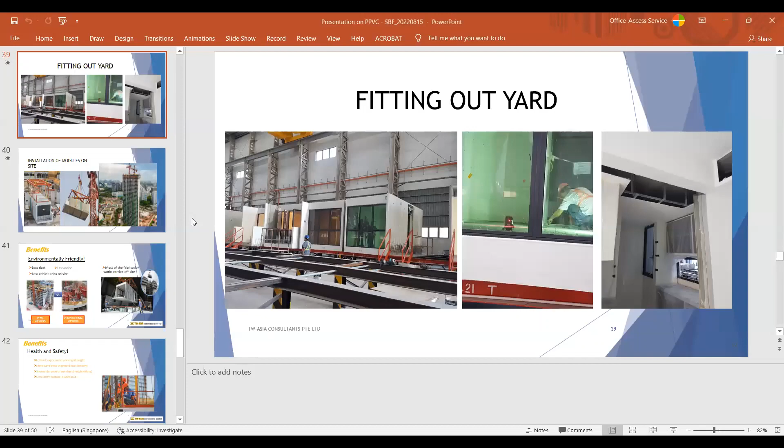Good afternoon, ladies and gentlemen. I am going to do my presentation on prefabricated, prefinished volumetric construction, which is commonly known as PPVC, the challenges and journey to achieve productivity target. So this is one of the PPVC, which you may see nowadays in many construction sites.

So as a consultant, TW Asia Consultants Private Limited, we are involved with many of the PPVC projects, some of which we can show you here, just photos. So all these are mostly residentials, though there are a few non-residential also. So one of the landmark PPVC projects is the Clement Canopy, which is 2 blocks of 40-story apartment buildings. And this is the first of its kind, meaning RC PPVC of 40-story apartment building.

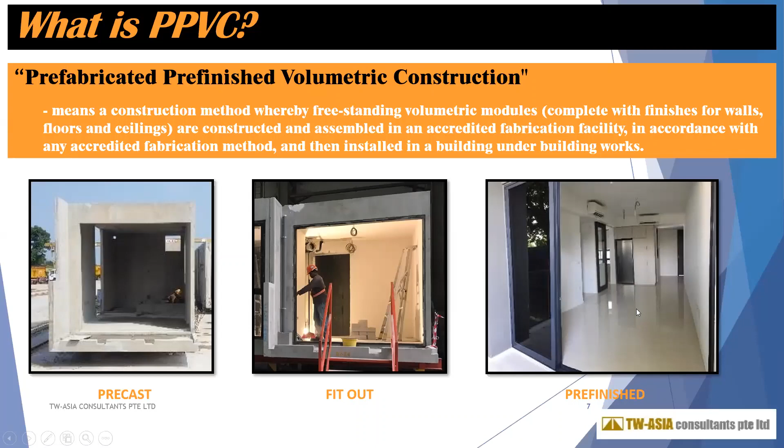So what is PPVC? This means a construction method whereby freestanding volumetric modules completed with finishes of walls, floors, and ceilings are constructed and assembled in an accredited fabrication facility in accordance with an accredited fabrication method and then installed in a building under building works. So it starts with precasting of the module, then the fit-out works, and you are getting the pre-finished unit or volumetric unit.

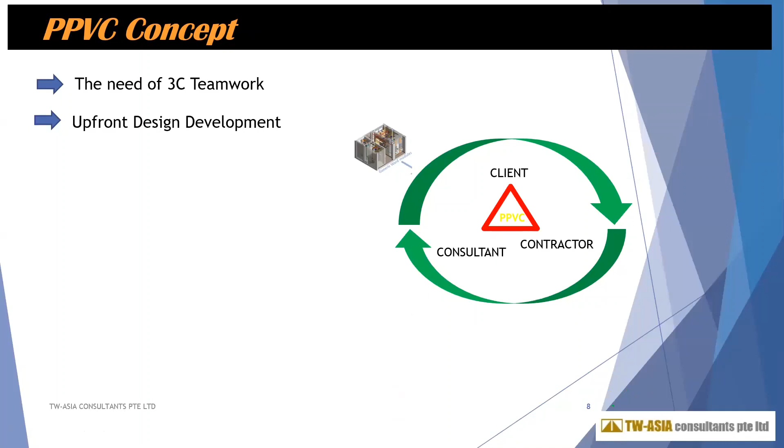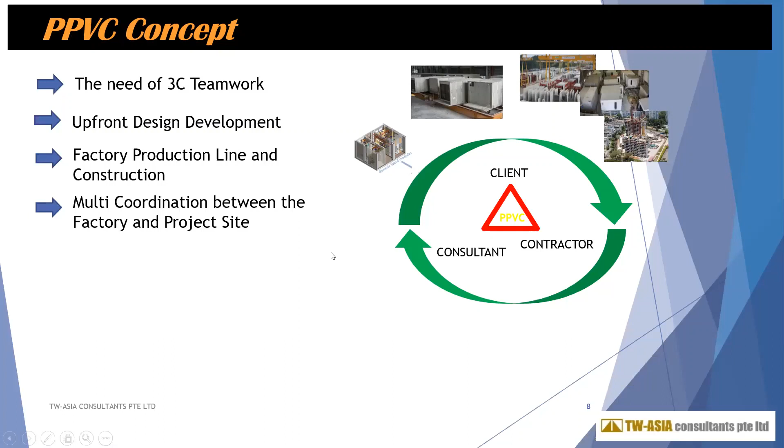So this actually requires, we can say, 3C teamwork. That means client, contractor, and consultants collaboration, and upfront design development. As you know, this is pre-finished. We are saying precast. So all the things need to be settled upfront. And it's a factory production line, so that means add-ons for factory production, and multi-coordination between the factory and the site. That means fabrication is in one place and the site will be in another place.

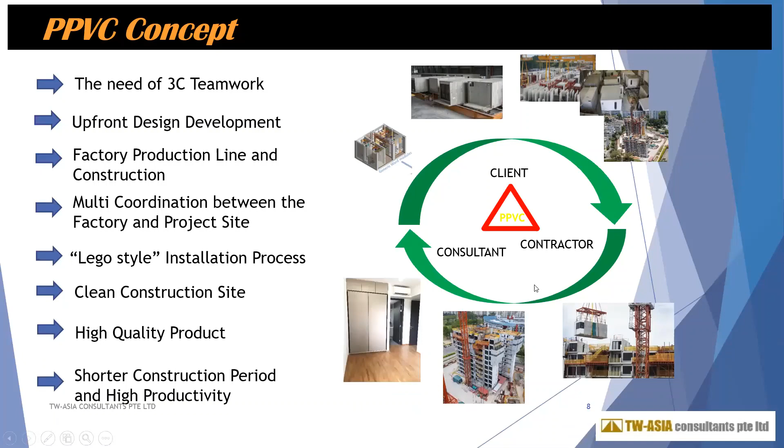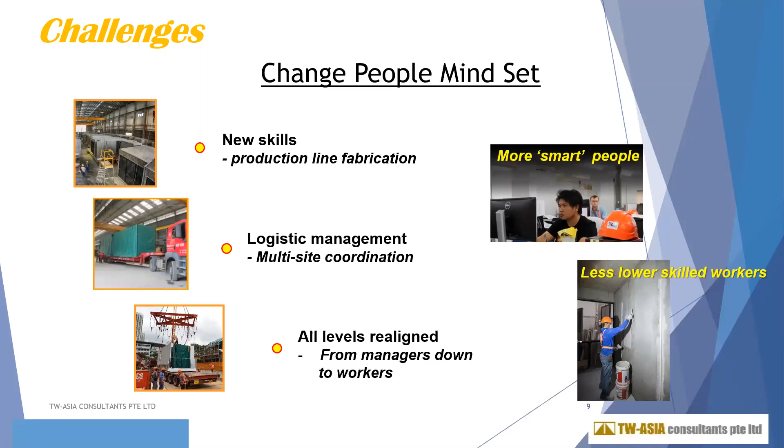And the installation is basically a Lego-type installation. That means putting on top or putting beside, and you are getting a clean construction site. So high quality products, shorter construction period and high productivity. And we need more smart people for this kind of work compared to conventional construction, and also a lesser skilled workers requirement.

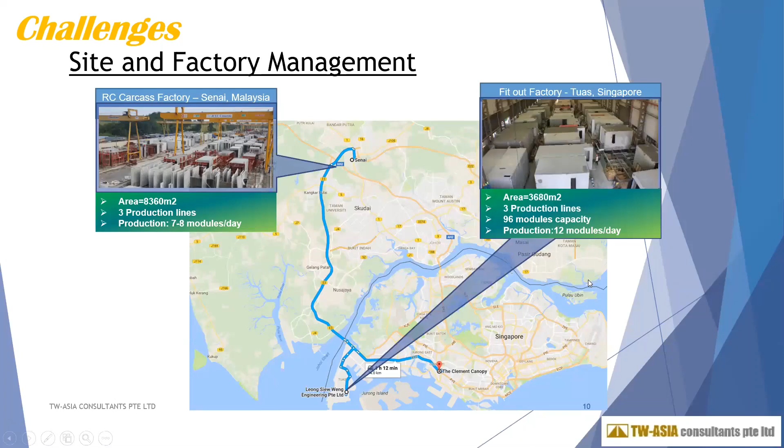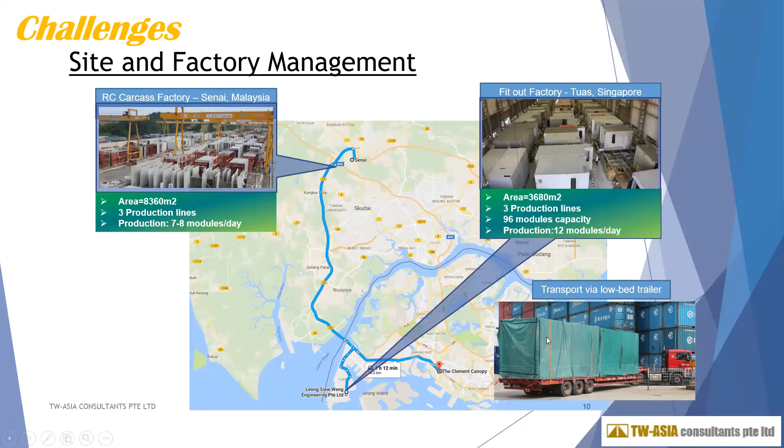Say, this is one site and factory management issue. The site may be at a far place. For this case, it is in Senai, Malaysia. And then it comes to the fitting-out factory in Tuas, Singapore. And the project itself may be in any place of Singapore, like over here is Clement Canopy. Yeah, that's there, Clementi Avenue 1.

So the challenges are, first, of course, the precasting. Then it is the fabrication yard. You need a large fabrication yard. Then, of course, a fitting-out yard, and final installation. So a typical convoy is something like this, and there is a limitation on the size because on road there is a limitation of lane width, which is 3.4 meters. So the PPVC unit cannot be more than 3.4 meters wide. Also, there is a height limit, which is 4.5. That is also a limitation that should be taken care of.

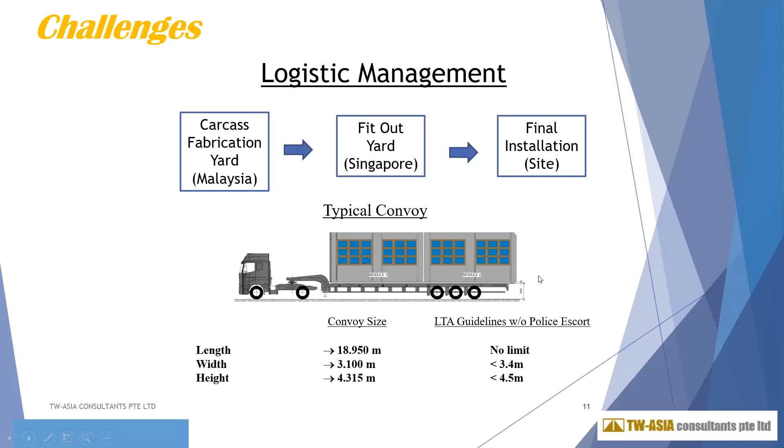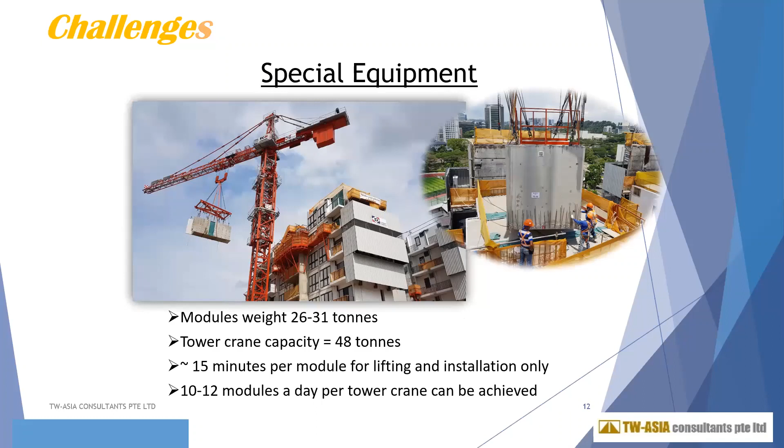So special equipment is also required because each PPVC module weighs about 26-31 tons. So you need a heavy capacity crane, tower crane, that can handle that kind of PPVC module.

So overview of PPVC: we already mentioned that it is prefabricated, prefinished volumetric construction, which is manufactured and assembled. The first one is basically component-wise construction. That means floor and wall separately and then assembled, or you can manufacture it as a whole 3D volume. So wherever we are casting this PPVC, that needs to be an accredited facility.

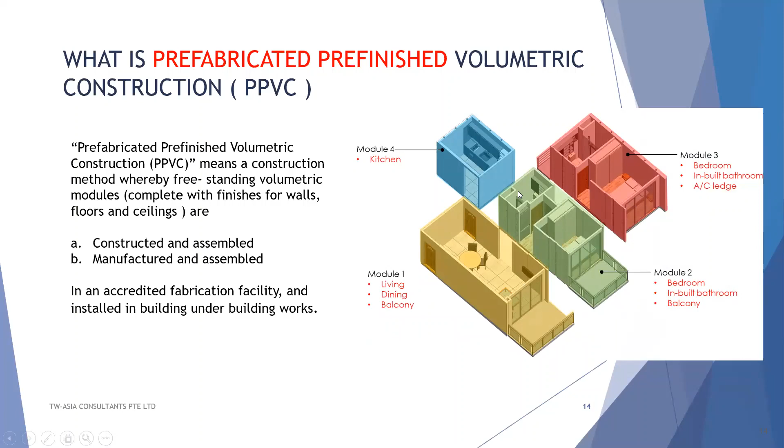So why PPVC? Driven by the need to reduce reliance on labor with shorter construction time, but with no compromise to quality. So productivity-wise, overall construction duration can be reduced with this construction method. And for each floor cycle, time of installation is shorter. The quality of building works is consistent in a controlled factory environment.

Higher quality control and assurance in the fabrication and assembly process, labor saving, improved worker safety, and it also provides environmentally friendly working conditions at site and less disturbance to the surroundings.

So we talk about concrete PPVC. Basically there can be two types of PPVC, mainly concrete PPVC and steel. For concrete PPVC, the advantages are lower cost, material readily available, good acoustic condition, durability, and low maintenance. The disadvantages are heavier modules and crane consideration; that means to handle those heavier modules, you need heavier cranes. So this is the concrete module.

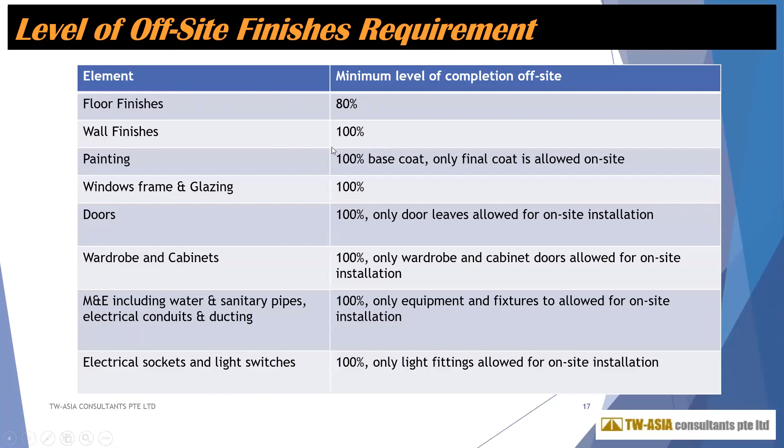Okay, for PPVC, there is a requirement from the regulatory authority that we need to complete the finishes at least to a certain percent, which is almost 100% for most of the trades. But for floor finishes, 80%, wall finishes 100%, and so on.

So here is a 3D module. All the MEP areas are inside, and it's a 6-sided module. That means the floor, roof, and 4 walls, 6-sided. So this module should be able to withstand the loads during transportation, during installation, and in the final building structure.

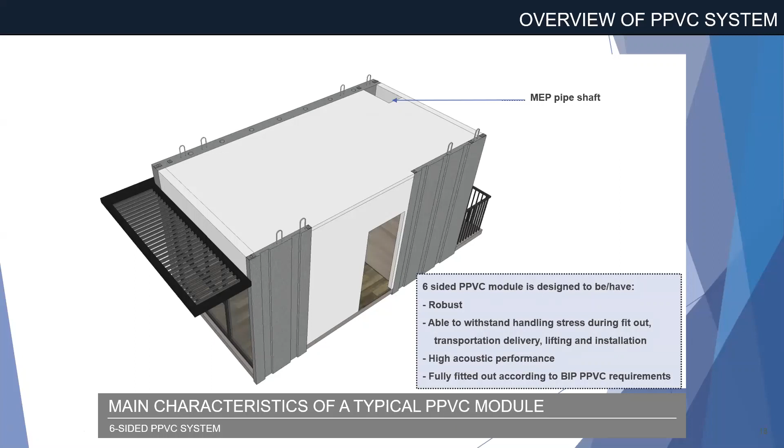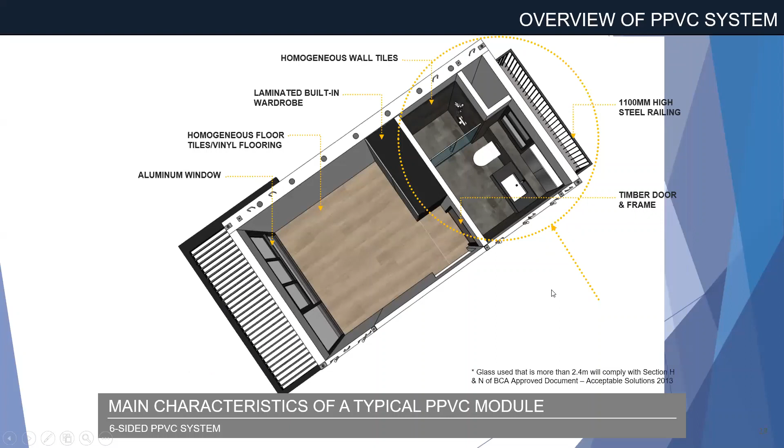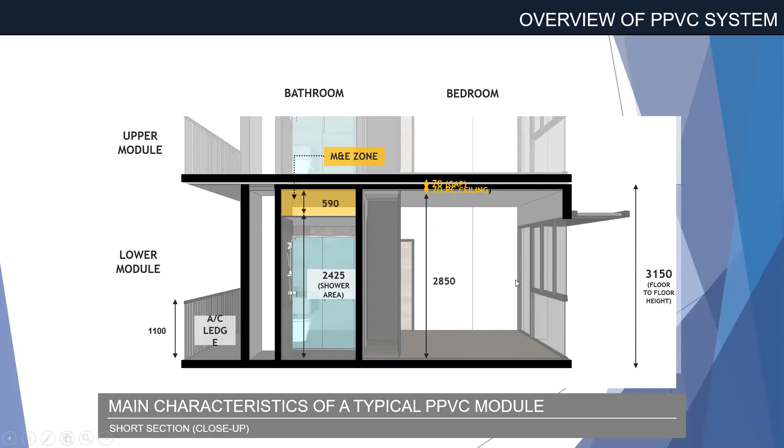So here is a section of the module. Over here, you can see the overall height is 3150 for a particular case, and the clear height you can get is 2850. The roof slab is a 70 mm RC ceiling, and there will be a gap between the floor and the slab below of about 70 mm. Once you put them side by side, it will be like this. And we have to do the joints in between all the modules to get the structural integrity.

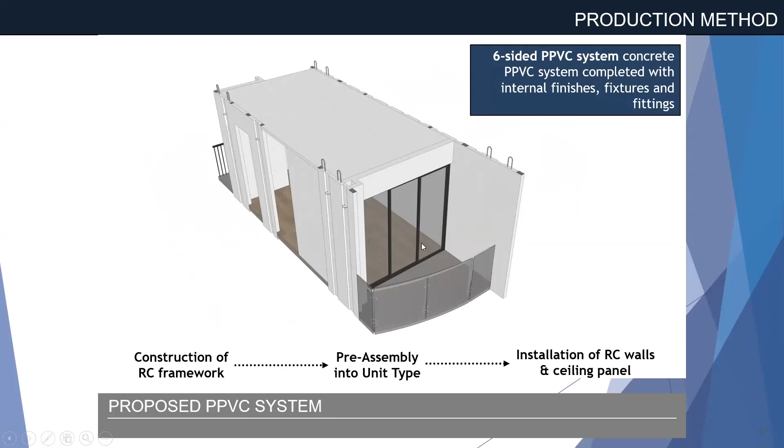So here is the single module. There is some flexibility needed to accommodate not only rectangular, but maybe slightly different shapes of the facade areas. So it's a 6-sided module.

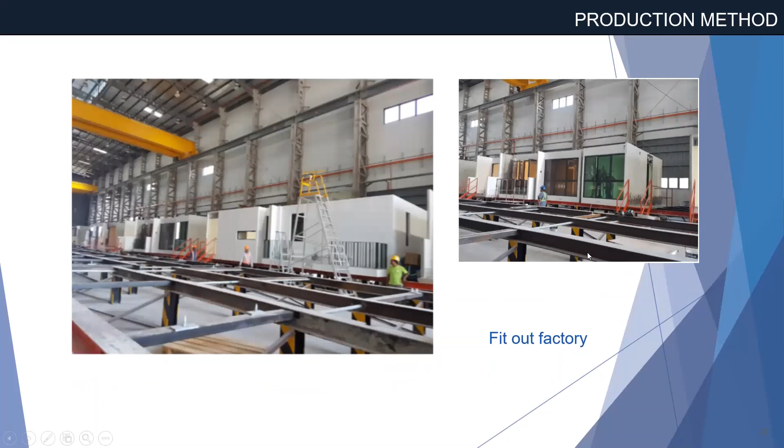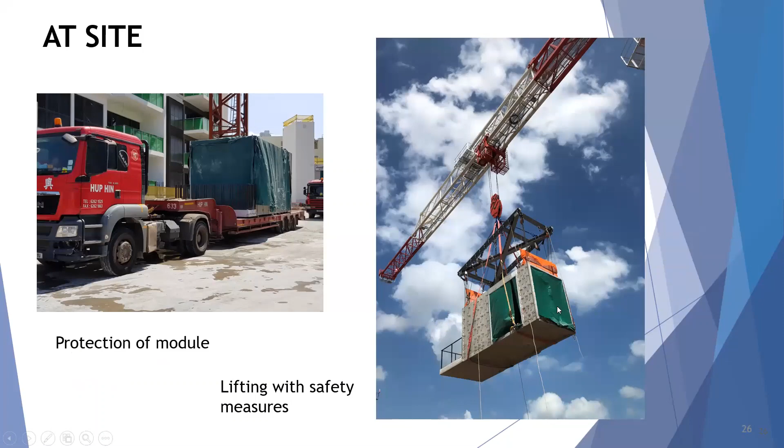So here is the construction process. In the casting yard, preparing the reinforcements, then preparing the formworks, and finally casting as a 3D module. Then it comes to the fit-out factory, which looks more industrialized, and all the cast 3D modules will be brought here to do the fit-out works in a controlled environment. Afterwards, of course, there is the transportation to the construction site, and finally lifting to the required level with proper safety measures.

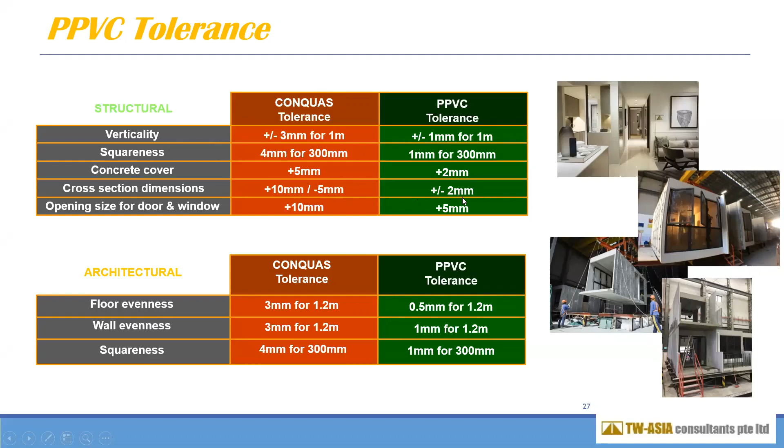Regarding the tolerances, PPVC can provide much better tolerance compared to cast in situ conventional construction. For example, for verticality, the CONQUAS requirement is ±3 mm for 1 meter, whereas PPVC can provide ±1 mm for 1 meter. Similarly, in all other cases, PPVC can provide much lesser tolerances compared to the allowable ones.

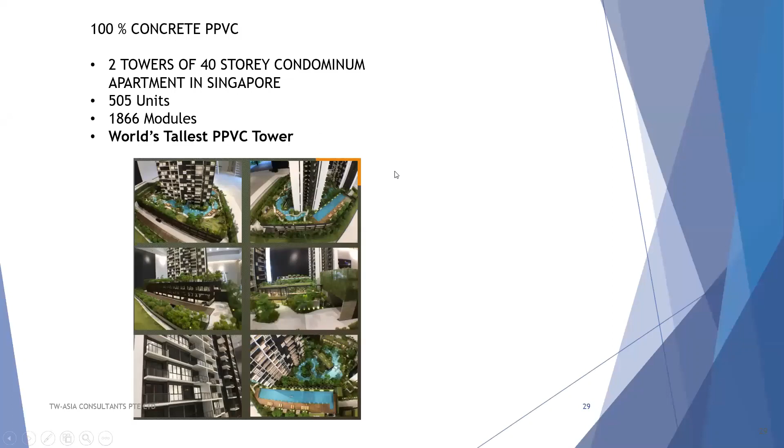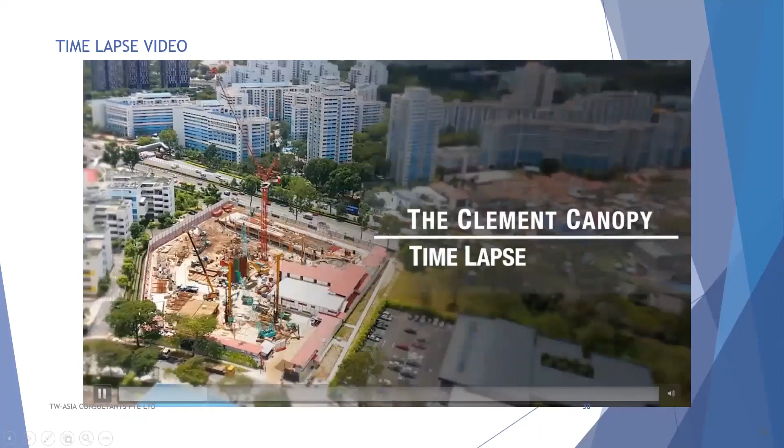Okay, we'll see a bit more on the Clement Canopy. That is the first 40-story concrete PPVC. As we mentioned, it's a 2-tower, 40-story condominium. We can show you a time-lapse video to see the construction process. So here it is from the beginning. The foundation is completed and then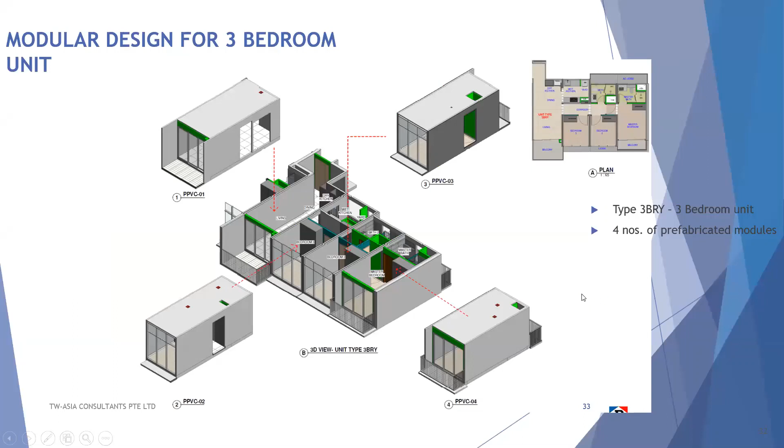So this is the 3-bedroom unit with the modules. There are 4 modules basically, module 1, 2, 3, and 4. The module size: the longest is 8.35 meters, width is 3.1 meters, and height 3.15. As we mentioned, the weight is 14 to 29 tons and so on.

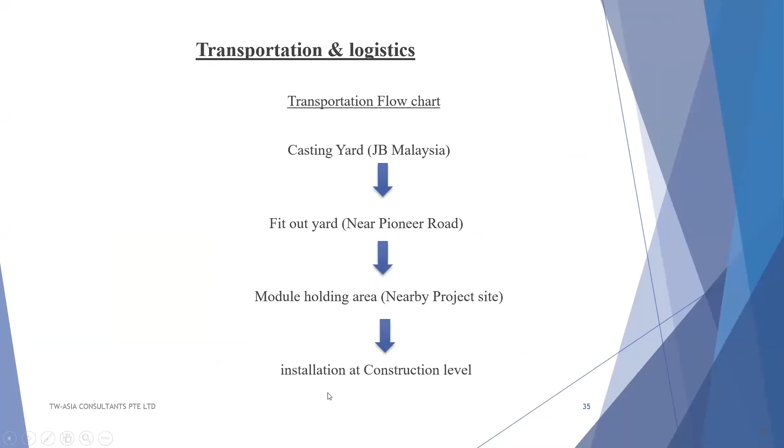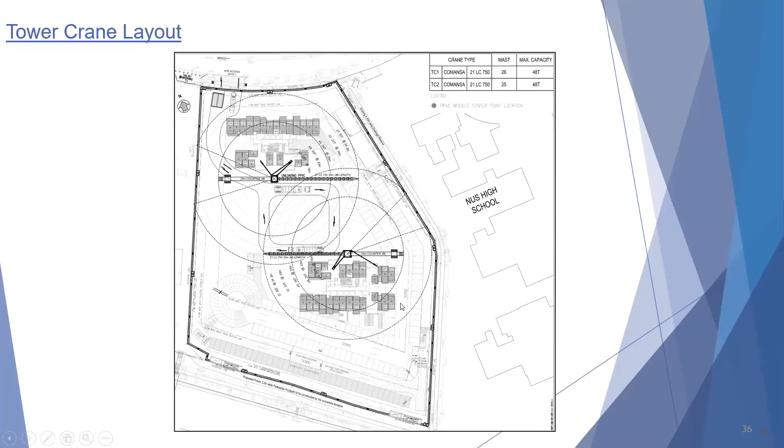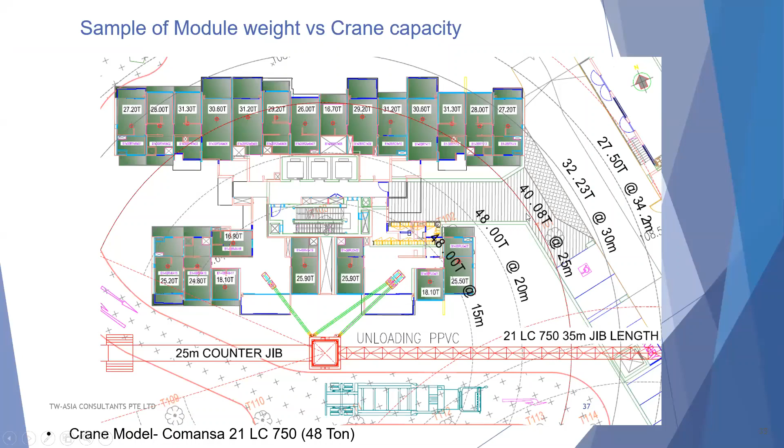So the casting yard is in JB, Malaysia, then the fit-out yard is near Pioneer Road. The module holding area was also near the project site, and installation at the construction site. For the crane layout plan, there are 2 blocks as we mentioned, so one crane for this block and another crane for this one. This is the crane capacity within the arm length. As the maximum module weight was 29 tons, it was able to be erected with a 48-ton crane.

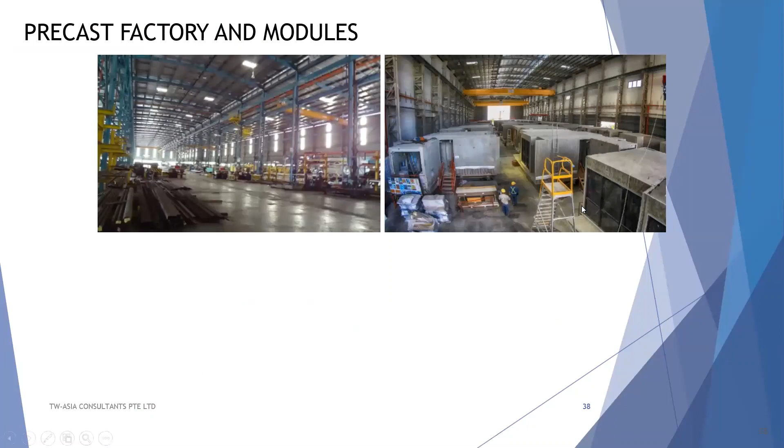So here is the precast factory over there, and these are some more photographs of the precast yard. This is just for storage, and then they are transported to the fit-out yard. In the fit-out yard, all the trades are completed in a factory environment.

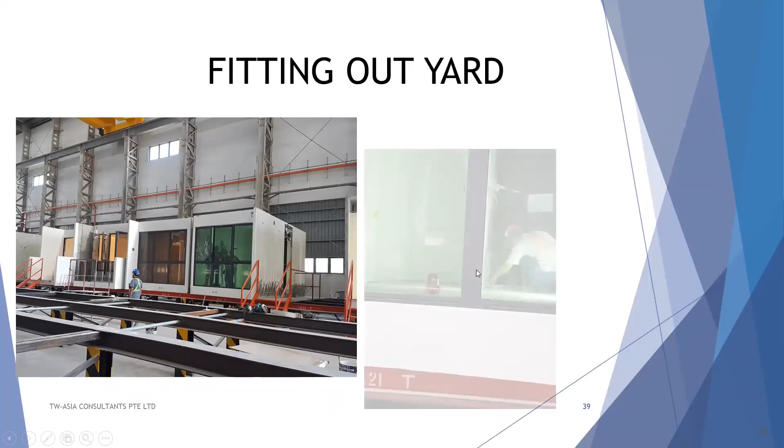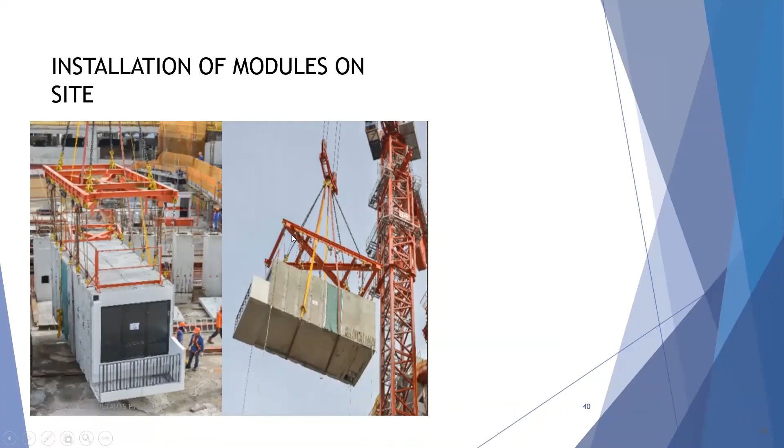Then installation of modules on site. It is lifted with a special type of lifting arrangement for uniform distribution of the lifting force, with additional safety measures also, and then completed the whole 40-story building.

Then productivity wise, the buildability score achieved is 95, whereas the requirement was 88. So it's quite high buildability. Also, the manpower productivity is 0.613 square meters per man day, whereas for normal construction, it is 0.357 square meters per man day.

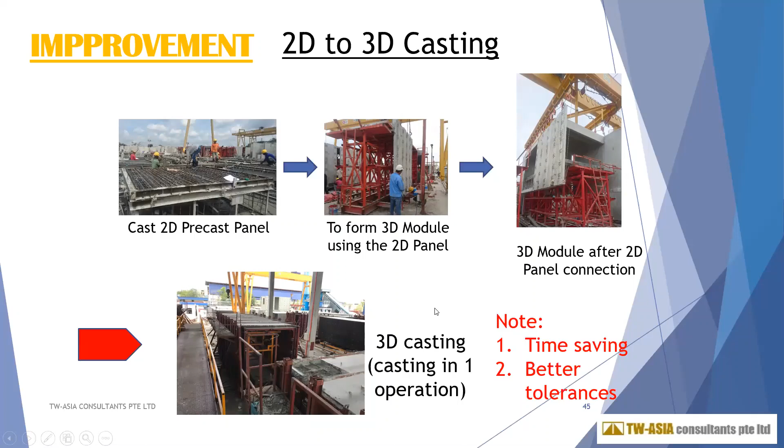So the key challenges were: heavier modules required heavier cranes, and fabrication and fit-out yards need large areas. And interface connection between the modules is an important design criterion. And a pre-match trial is required before putting it onto the structure, so that the modules can fit perfectly. And robustness of the structure needs to be achieved through structural connection.

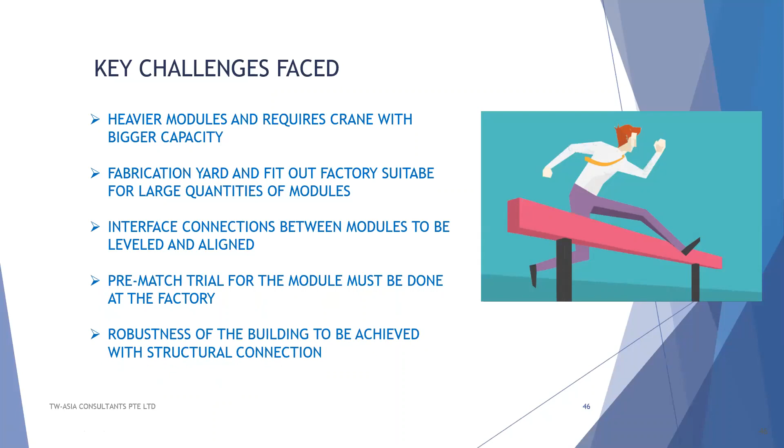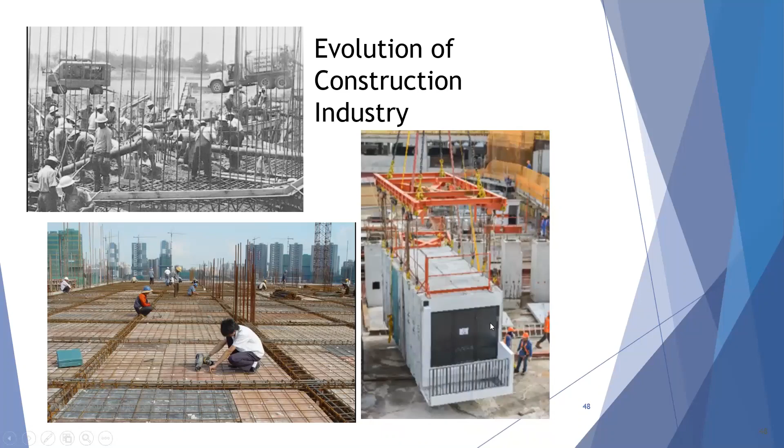So concluding remarks: you need the right people because the work area has changed. You know the evolution of mobile phones, how it has changed. It was quite rapid, but for the construction industry, though it is not so rapid, it is changing, of course, from conventional to now volumetric construction. So collaboration is very important. Then deliberation of technical skills, evaluation of production proposals, timely decisions, as they need to be settled before the precast works start. So let's collaborate to make it happen.

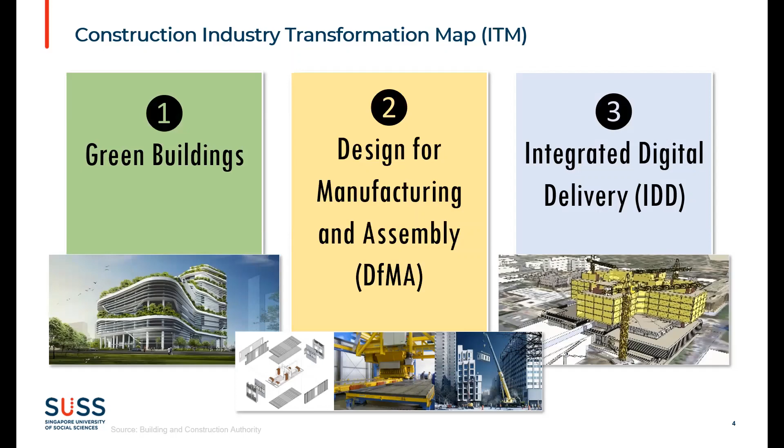For DFMA, as I mentioned in the previous slides, DFMA is one of the key pillars under ITM. It's defined as a game-changing technology in our AEC industry. DFMA combines two methodologies. One is DfM, design for manufacture. Another is DfA, design for assembly. DfM means design for ease of manufacture of the parts that will form a product. DfA means design of the product for ease of assembly on the construction site. DFMA demonstrates various benefits, already mentioned by the previous speaker, Dr. Ismail.

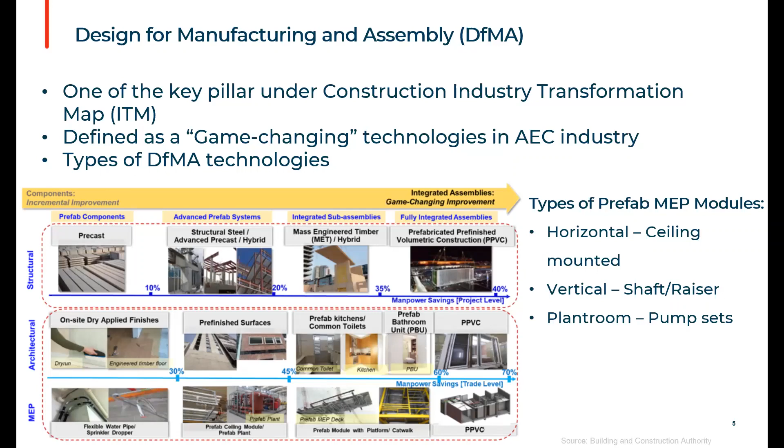And for MEP modularization, according to the BCA guideline, there are three types. One is horizontal, which is ceiling mounted. Another is vertical, basically the shaft, the riser. And the last is the plant room, basically a pump set.

On the other hand, the digitalization journey in Singapore also gained its momentum. Digitalization brings various benefits to the industry, like improved on-site and off-site construction and coordination, and better visualization. In fact, Singapore's digitalization journey has evolved from BIM to virtual design and construction to IDD. Singapore has been promoting BIM since 2010. The first roadmap emphasized widespread industry BIM adoption, more on mandatory BIM e-submission and single-purpose BIM: creating a BIM model for submission, for quantity takeoff, and so on.

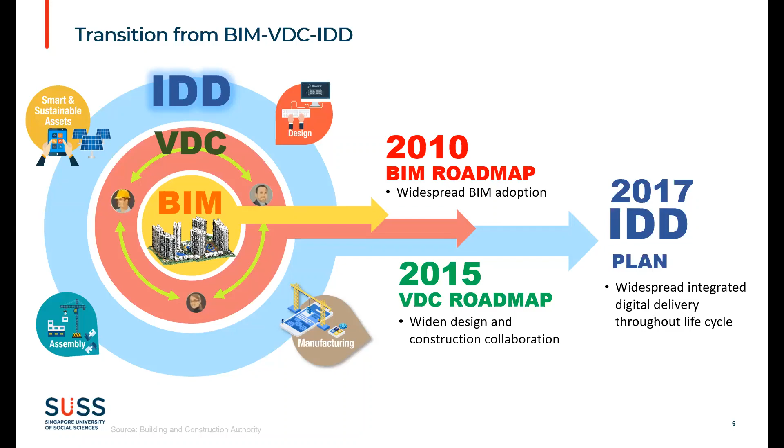Then in 2015, there was an initiative called Virtual Design and Construction, VDC, emphasizing widening design and construction collaboration through the VDC methodology. In 2017, Singapore BCA rolled out the third BIM roadmap, integrated digital delivery, IDD in short. The objective for IDD, according to BCA, is widespread IDD adoption through the whole life cycle in Singapore's built environment sector. I would like to emphasize that the backbone of IDD is BIM, as you can observe from this figure, which is borrowed from BCA.

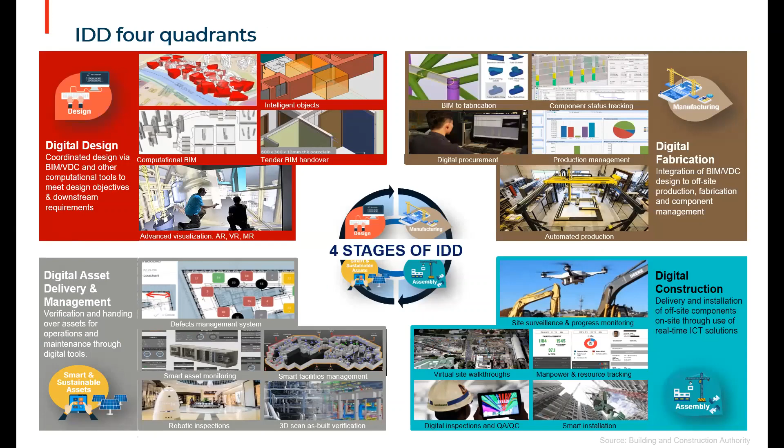BCA's vision of the scope of IDD covers four phases: digital design, digital manufacturing and fabrication, digital construction, and finally digital asset delivery and management. However, I would like to stress that these are not four separate silos; they are connected as a whole. In my personal view, IDD serves as a horizontal enabler supporting several other key pillars defined under Singapore's Construction ITM: Green Mark, DFMA, and even Smart FM.

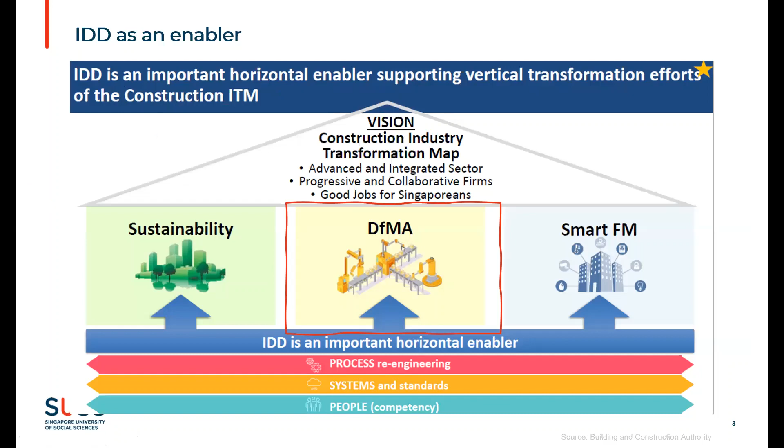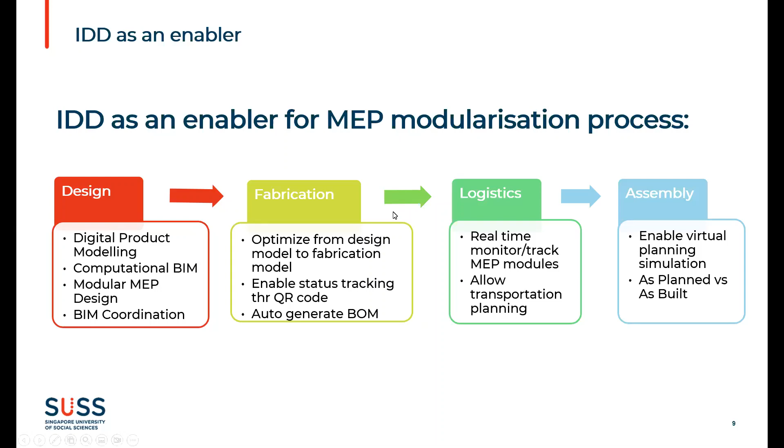Please allow me to elaborate on how IDD supports DFMA, in particular the MEP modularization process, through design, fabrication, and construction, further broken down into logistics and assembly. For FM, obviously there are also a number of digital use cases during the FM stage, for example leveraging BIM intelligent objects for modular MEP maintenance spacing checking. As BIM offers better visualization, people create additional geometry attached to the BIM to perform maintenance checking. I will not list them all; due to lack of time, I will only emphasize design, fabrication, logistics, and assembly today.

First of all, I think it's critical to have a real manufacturer BIM object instead of a generic BIM object during the design phases. As the real manufacturer BIM object contains real manufacturer data, it will facilitate and ease the modular MEP downstream. However, understanding from some of the consultants, the real manufacturer detail normally would not be specified in the BIM model, and the designer only specifies those parameters which are relevant to building performance based on the real manufacturer parameter.

So there are solutions in the market nowadays that provide real manufacturer BIM objects and assist the designer to just click a button, then it will remove all the manufacturer parameters. Then the model will be fit for tendering and handover purposes. So utilizing real manufacturer objects such as mechanical equipment, valve parts, and other components at a level of 1-to-1 millimeter real manufacturer product, the company will slowly and continuously accumulate and expand their object library for MEP modularization.

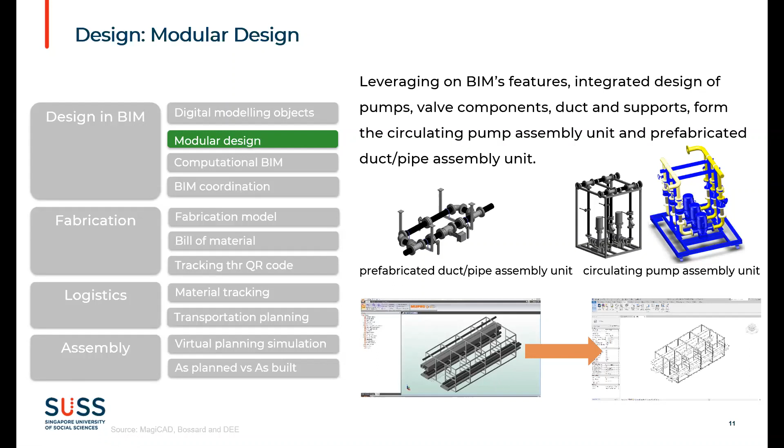So in the local industry, stakeholders are importing an analysis model into BIM modeling software after analysis, as shown in the figure below. They perform an analysis in the software, then they export the model to one of the authoring software, which is Revit. Some BIM models are created part by part, then formed into this integrated MEP modularization with all these chillers.

Then the third use case during the design stages will be computational BIM. Leveraging on a computational BIM approach, we could generate various design options. Computational BIM as defined by BCA refers to leveraging on a problem-solving approach, where we can change certain parameters to have automated design. Below is an example from industry. They are creating a BIM model of a modular supporting frame. By changing the parameters in the model, they can have different design options for this supporting frame. So by using this, we can generate quite a lot of design options within a limited time.

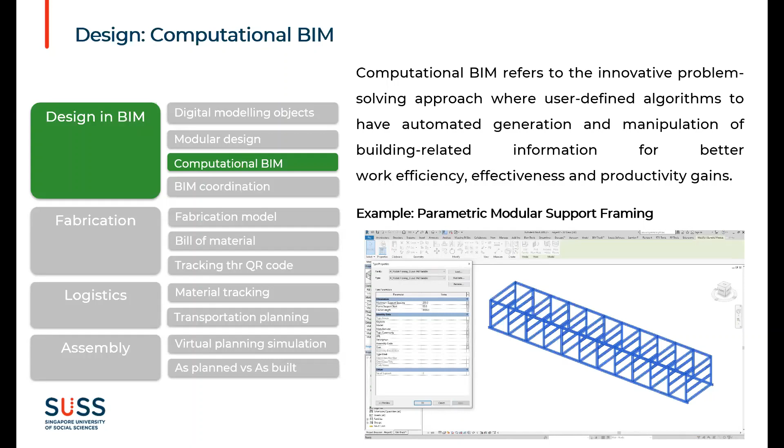Next, based on AR/VR technology, we do BIM coordination. We could leverage on AR/VR and even the MR big room concept to evaluate different types of modular design. Project stakeholders could increase their efficiency and communication in coordination through VR/AR. The first and second images here are about VR. For the first one, below you have a QR code. You can scan the QR code, then you will see the 3D MEP modular model in a virtual environment. You can put your phone into your glasses, then you can have a feel of how this pump room looks.

The second image here is another type of VR, but most of the time we need to connect it to the software. This wearable VR needs to connect with the software. This VR technology enables different stakeholders, just by wearing the glasses with a navigator, to virtually walk into the model and perform their coordination. Especially during the COVID pandemic, we saw some stakeholders bring different stakeholders into the virtual model to perform coordination.

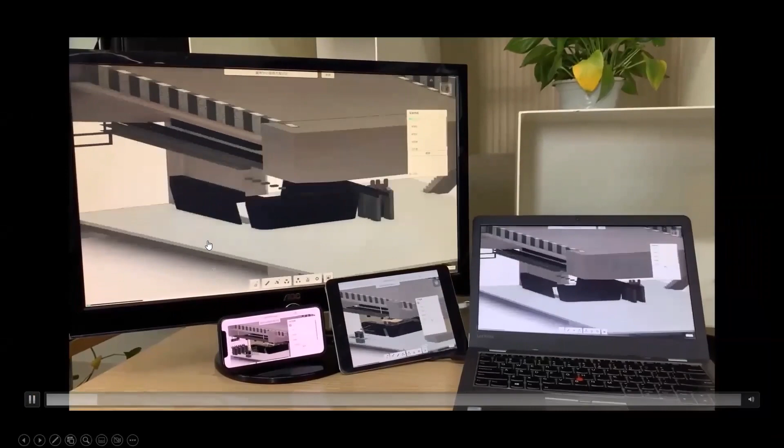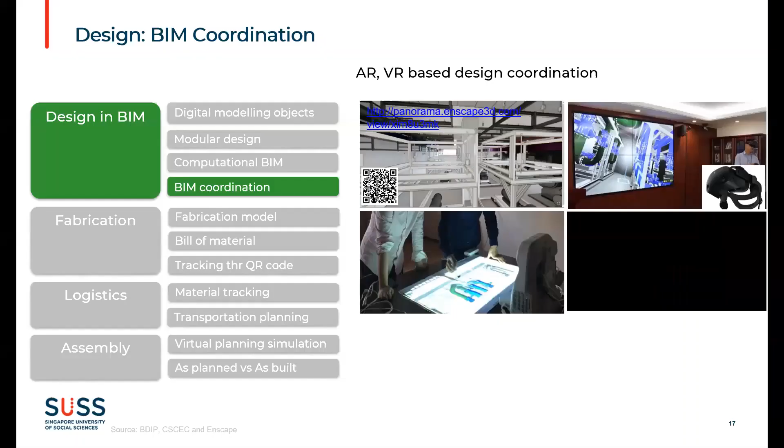Then the third image is about the concept of a big room. They bring different stakeholders into the room to discuss the different design options. Then the video in the corner here is one of the BIM solutions, called BDIP, which allows real-time model sharing and discussion among different participants, through iPad, iPhone, or even your laptop. So once we move one, the rest will be moved accordingly.

Okay, next I zoom into the fabrication part. Under the fabrication part, there are three observations. First one is the fabrication model. Second one will be generate bill of material. Then lastly will be tracking through a QR code and RFID.

So from here, BIM authoring tools actually allow you to convert the design intent model into a fabrication model, and be able to send it to the fabrication machine for fabrication. Then it would cut the duct optimally to save the duct metal materials. You can also leverage BIM authoring tools to generate the fabrication details as shown in the figure below here. They even indicate different color codes for different components, supply, return, yeah.

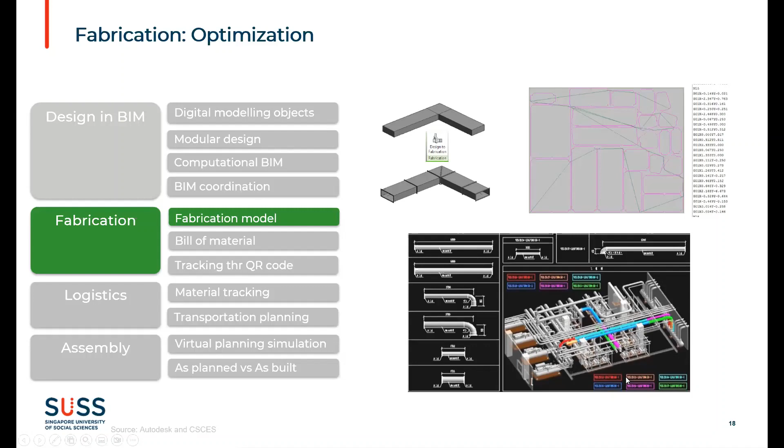So next, bill of material: better control of the MEP modular costs. BIM enables QTO, quantity takeoff. It could actually generate a bill of material through a native BIM function. So the BIM function actually offers you this QTO function.

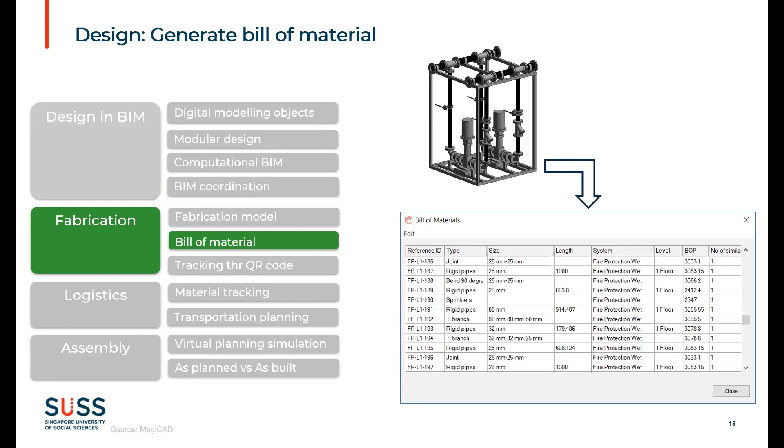Okay, next, tracking through QR code. We have increasingly seen tracking the status of different components of PPVC, modular components, through QR code and RFID nowadays in the market. Here is just an example. QR code actually enables bi-directional information management. It's not just a single way on the construction side, you scan, you see the info.

Actually, it's bi-directional. So on site, you can scan the QR code and query the info: this component is delivered by who, built by who. This kind of info can be done through certain apps. By using your mobile phone to scan, you will know the information. Then the other way, the info you scan on the construction site can also record the status, like production, delivery, installation. This kind of info can also sync back to your BIM model.

You can see below here, the guy is scanning the QR code and bringing the info back into the BIM model. Then the BIM model also displays different color codes: a certain component is already delivered, a certain component is already after QA/QC. So this kind of thing can be done through QR code tracking.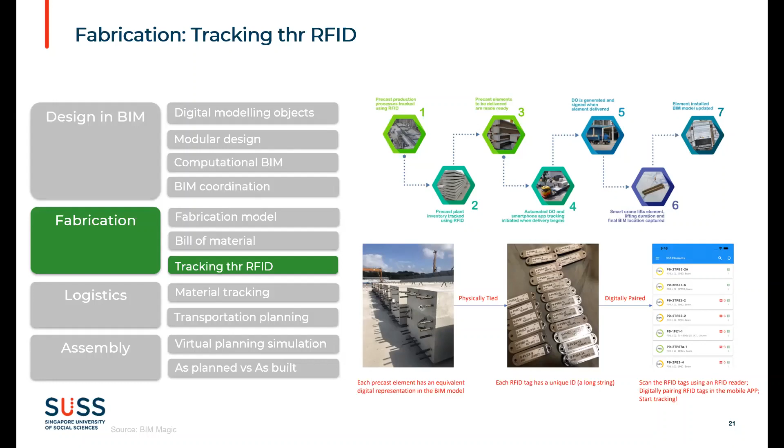And moving into logistics. Nowadays, some CDE, common data environment, or IDD platforms support the model components and views to generate QR codes and share the links in batches. The link can be sent to the project participants for quick location and sharing, and the QR code can also be printed and pasted at the corresponding location on site.

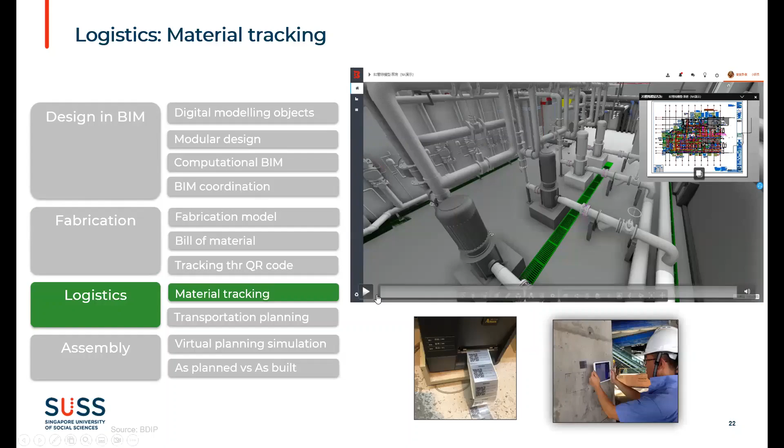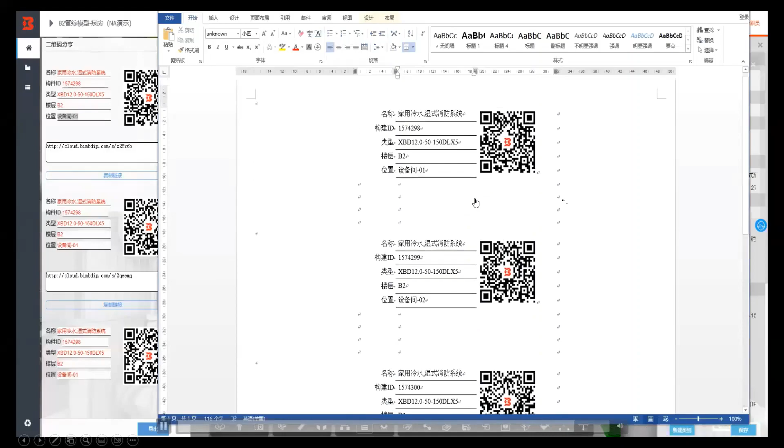Here's a video of how they are generating this QR code. It's batch QR code generation. And the QR code contains the key information, which they then print out by this printer, then paste onto the construction site.

And the next digital use case is transportation planning. Leveraging BIM technology, we can do transportation simulation to simulate the loading and transportation of the MEP modular units and place them reasonably to fully utilize the space of the transportation vehicles and maximize the transportation efficiency.

And lastly, moving into assembly. Leveraging BIM or IDD, we could simulate and plan the assembly sequencing and the assembly method of the MEP modular. Here is a use case of virtual construction to ensure the feasibility of the assembly on the construction site. They actually simulate the pump set. They create a model to see how this pump set will go into this pump room.

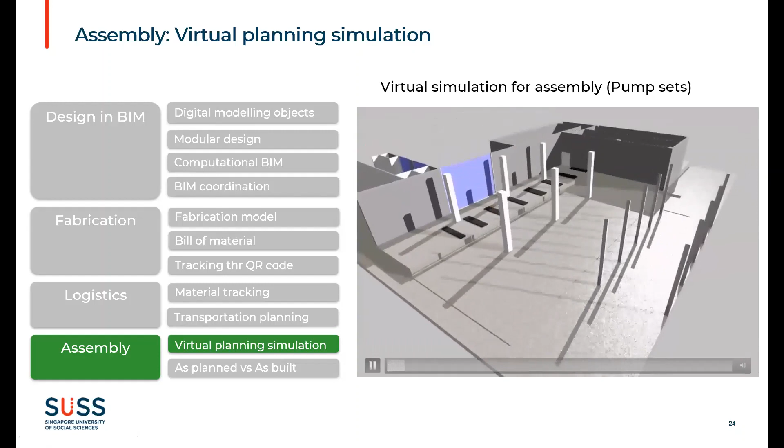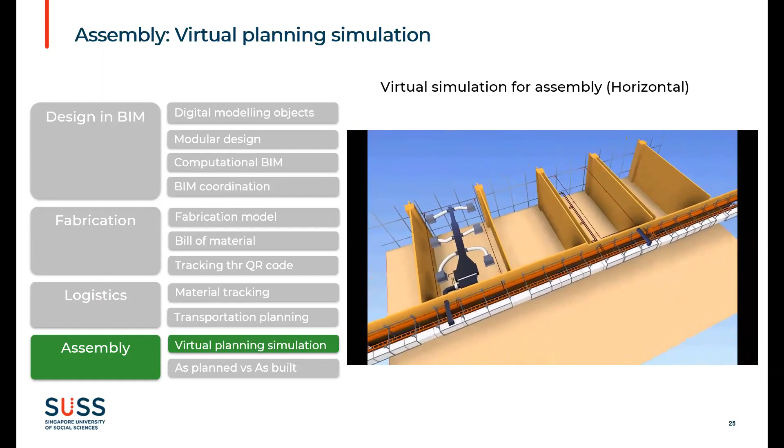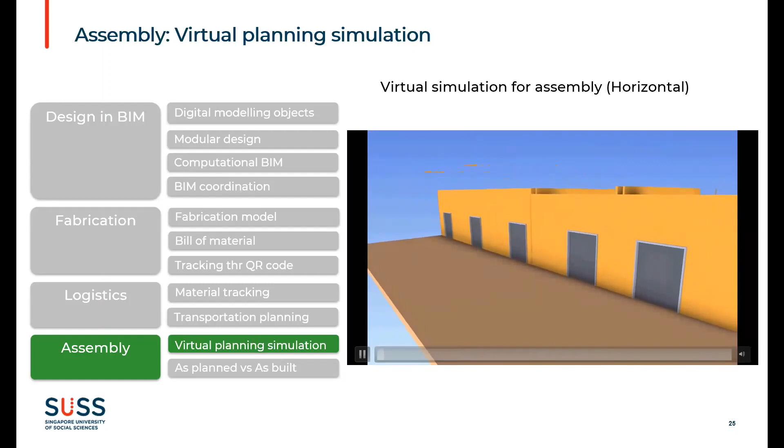Lastly, with 3D laser scanning technology, we can scan the constructed MEP modularization, then take it back to compare with the BIM model to see the tolerance and perhaps to validate the BIM model. These are the use cases that also happen in the construction industry.

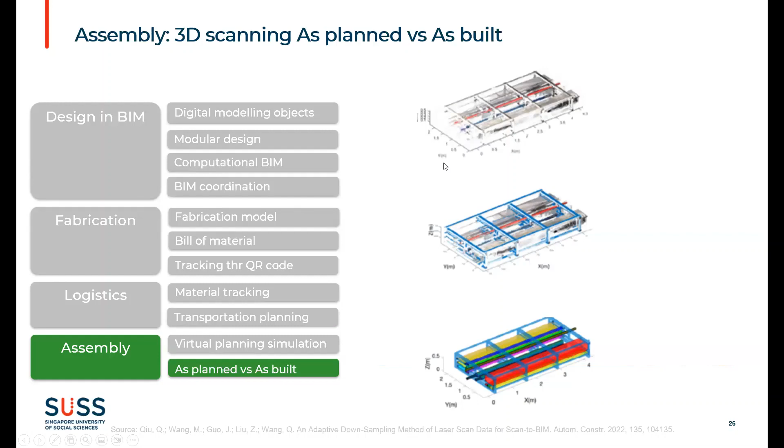And with that, I would like to conclude my presentation. Over the past few years, BIM, DFMA, and in particular MEP modularization have attracted interest in our industry, and we see quite a lot of projects adopt both. There is a transformation from BIM to VDC to IDD in the local industry, and across the IDD life cycle, IDD enables MEP modularization through 4 phases: design, fabrication, logistics, and assembly.

And there are 10 observations made through IDD for MEP modularization. During design: digital modeling objects, AR and VR boost BIM coordination, and enhanced decision making through computational BIM. Coming into fabrication: optimizing the design model into a fabrication model, enabling status through QR code or RFID tracking, and auto-generating a BOM. In assembly, we can do virtual planning, and we can also do scanning to compare as-planned versus as-built.

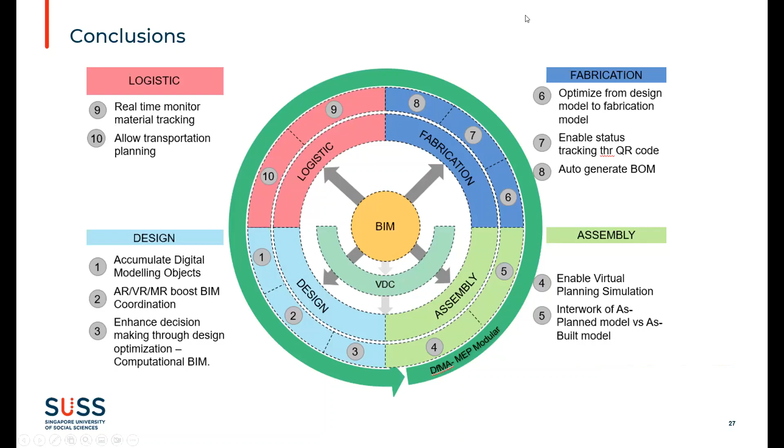On logistics, we can do tracking through QR code. We can also do transportation planning. These are the 10 digital use cases across the IDD life cycle.

And here is a digital use case in China. I coincidentally saw this WeChat post yesterday, and I think it also fits today's topic. This project is done by Chinacom, for a refrigerant heat exchange station. They adopt a BIM or digital plus fabrication construction mode.

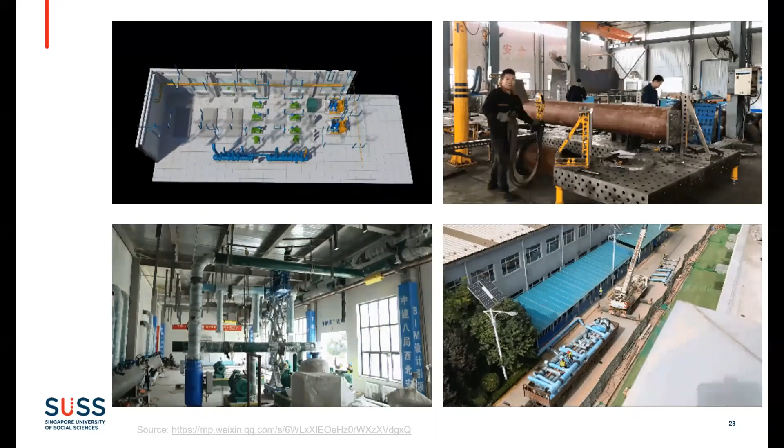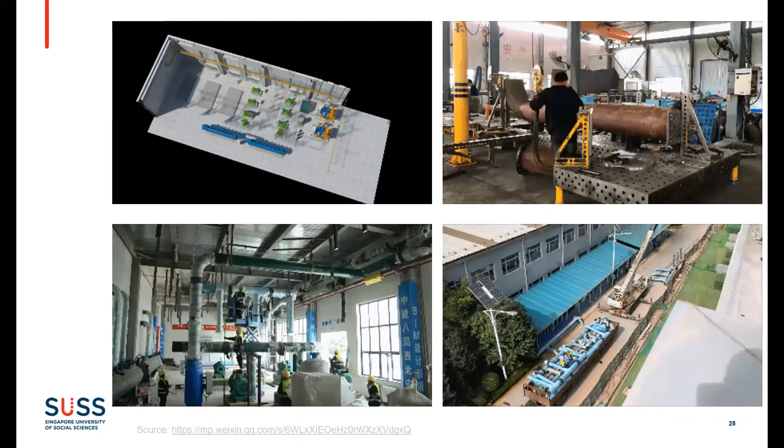It includes these 4 phases. One is BIM in design. Second is BIM with fabrication. Then in logistics, they use BIM plus IoT for positioning and distribution. And lastly is BIM assembly in construction. These are the 4-dimensional integration forms of this new construction method. If you are keen to know more, here is the link below.

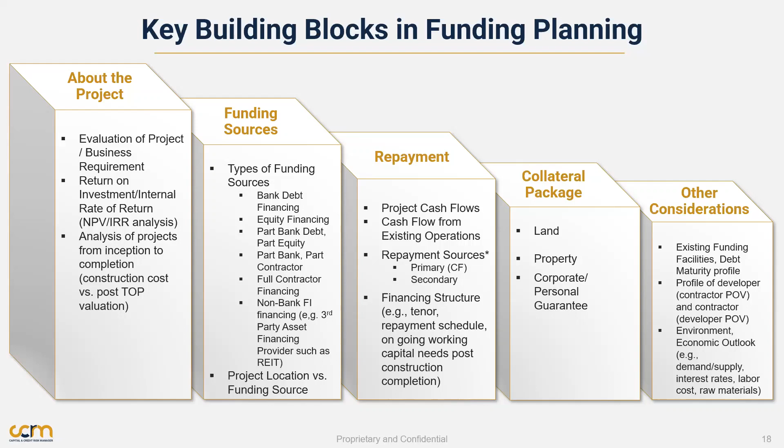So all these things, I hope, give the audience today a bit of flavor. What are the categorization of areas that any particular funder, especially lenders in the area of debt, would typically look at? So this is basically one busy slide. I hope that it allows to provide the audience a view of these few components. May I ask Hazel to move to the next slide, please? I think there's one more, but yes, thank you, Hazel.

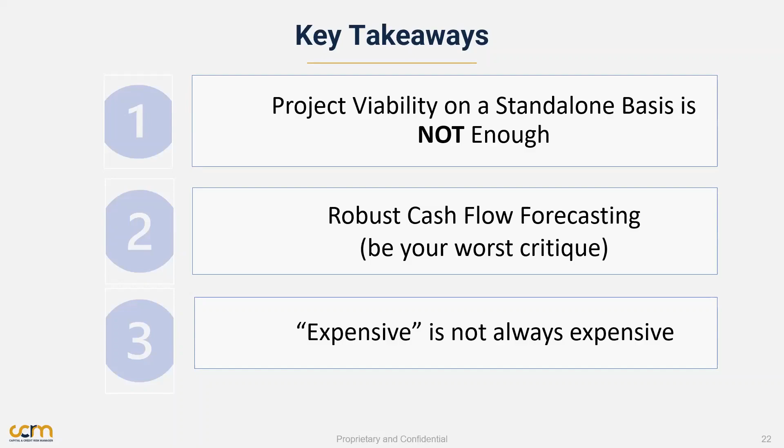So we have a question, let me read out the question. It's for Dr. Rafi. Okay, so the question is, which is preferred, PUF panels or manually insulated walls? So would you like to take this question and answer it live? Okay.

I consider that this question came with respect to maybe steel PPVC construction. So for the wall of the steel PPVC, when you have alternative materials, the choice is not a straightforward one, which one is the best. It depends on your requirement basically. Where you are using it is also an important criterion, whether internal wall or external wall, and also what kind of function you are expecting.

That means you are expecting sound insulation, then maybe thermal insulation. So what is your requirement, how much you need. Regarding the PUF, that is a pre-finished product, so you have to choose from their available product categories. And on the other hand, a manually insulated wall is customized; you can do your customization as you require.